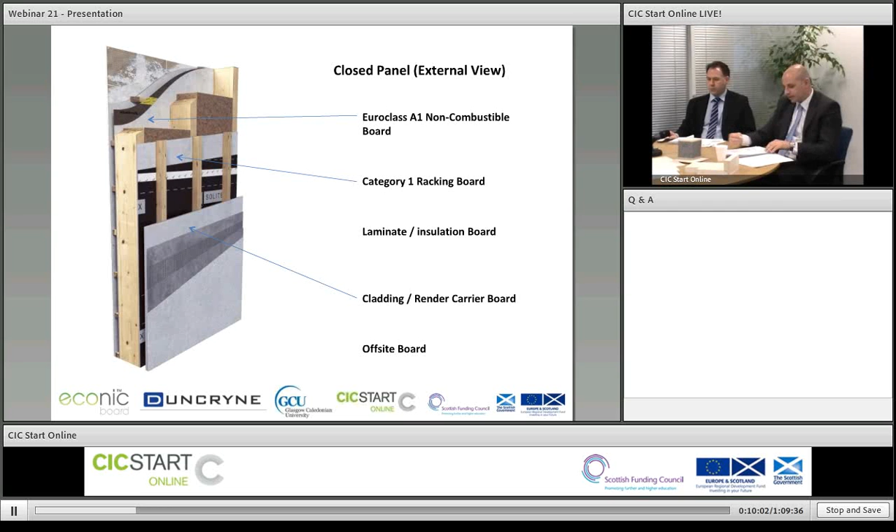It's also a Category 1 racking board, and we've tested it on both timber and metal frames. We can use it therefore as a sheathing board in lieu of OSB, instead of plywood or chipboard. Econic board's got an exceptional bonding surface, which makes it ideal for adhering different substrates, laminates, insulation, like our SIP panel, fixing wall ties, external cladding panels, etc. We've also had it tested to MOAT 22 and ETAG 004 for render carrier board, and it's passed for both painted and render finishes.

We also think it's good as an off-site board. We see it as an ideal replacement for the timber, as we said, and for use in off-site and volumetric construction. Econic board has got a very good vapour permeability, which makes it ideal as a board for use in a breathing wall construction. Econic boards are inert, non-toxic, free from formaldehyde, benzene, solvents. It's got no oil-based chemicals, therefore contributing, we believe, positively to a healthy indoor environment.

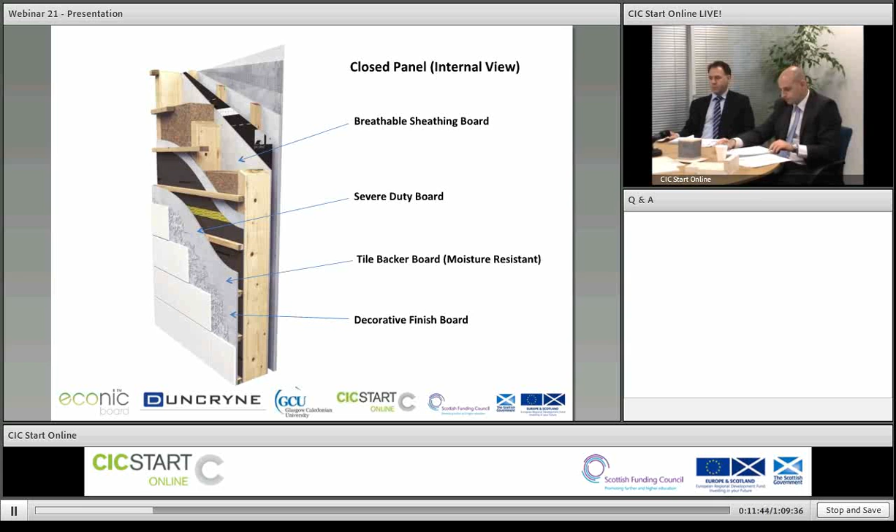It's also got a severe duty rating for impact, which we think makes it ideal for high traffic areas like schools, hospitals, institutions, student accommodation, etc. Because Econic board is unaffected structurally when it's in contact with moisture, and because of its good adherence properties, it makes an ideal tile backer board for both domestic and commercial applications. And finally, on its own, it makes a good decorative finish panel. It can easily be taped and filled and simply painted as a finished product. Next one.

This slide here demonstrates how versatile Econic board is. It's an all-round solution for many construction applications, and it compares favourably to competing materials in quite a few aspects. Given all these uses and potential uses, we have a number of applications and sectors where Econic board is being used and where we would like it to be developed: as a sheathing board, the most simple application; passive fire applications for cladding of structural steelwork, etc.; SIP panels, where it has been tested and is being used by a couple of SIP panel manufacturers at the moment; modular construction; non-combustible thermal and acoustic upgrading systems.

Here we are in discussions with a number of manufacturers to create new products to attach their insulation systems, whether it be for thermal or acoustic applications, to create a non-combustible solution. Finally, the biomass and agricultural uses are something that we would like to expand into, but also any ideas from any of the participants today, we'd be delighted to hear what they may be.

And finally, because we know what the board can do and its performance criteria, we were also very keen to know about its sustainability aspects. We know the process to manufacture the board. We believed it to be low carbon, low energy use, but we wanted this verified. So through a CIC Start programme, we were very pleased that Charles came on board to carry out a full life cycle analysis. I'll just hand over to Charles now to talk you through his studies. Thanks, David. Let me just push on to this.

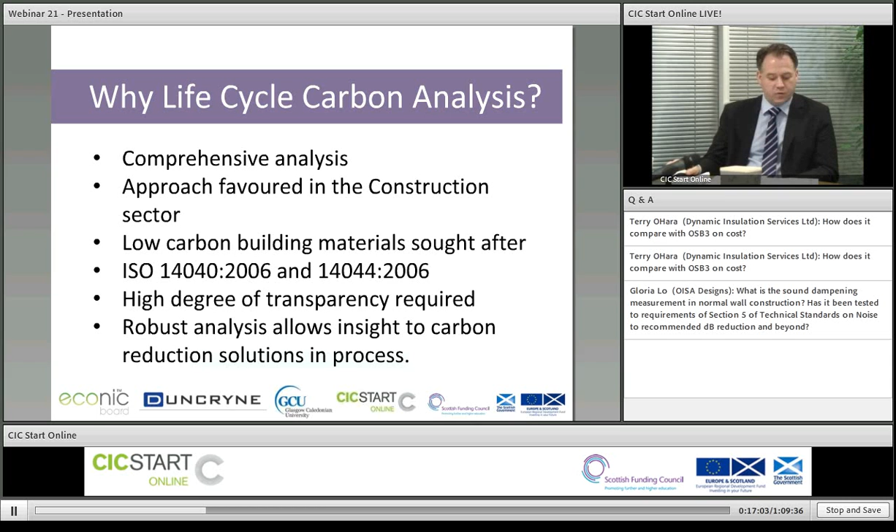Let's have a look and see what's included in this life cycle analysis. First of all, and it's very important, we looked at the embodied energy where we could of the primary ingredients. I'll come to the primary ingredients shortly. Secondly, we looked at the product manufacturing process, where the product is manufactured in southern China, and we've taken as much detail as we can to work that out and present that here. There is some limitation on what we can and cannot present for confidentiality reasons, but I think what we'll show here today will give you a good sense of what the life cycle analysis comes out at.

Transport to China, from China to the UK, there's obviously transport of the raw materials within China, and we've included that, but also one of the criticisms that's often leveled at companies importing products is that there's such a high amount of emissions associated with the transportation of the product to the UK. So we've looked at that; of course, that's included in our life cycle.

We've looked at the waste management element, and we've also looked at carbon dioxide absorption. It's a very important feature of this product. I'm going to go into a little bit more detail about that, because it affects the whole life cycle element. And we've assumed that 95% of the emissions that are associated with the manufacture of the product and life cycle of the product are captured by this analysis.

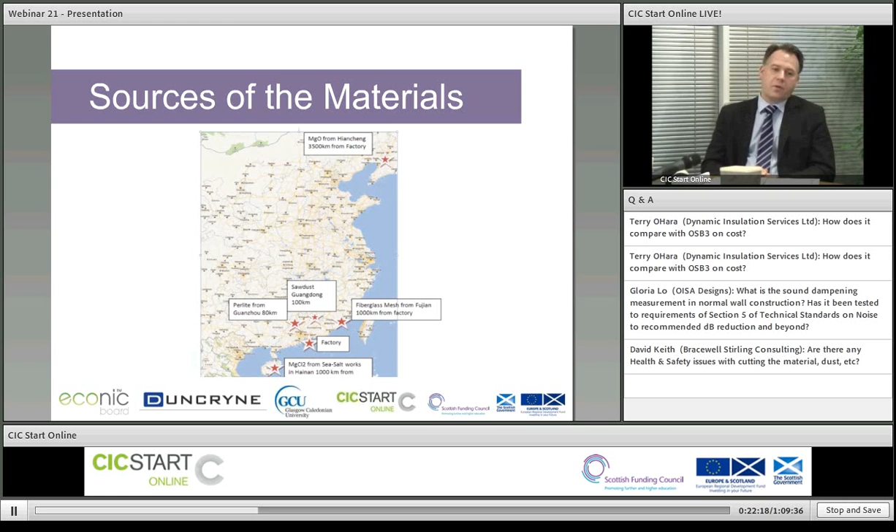Now, in calculating greenhouse gas emissions, I've used, really for the sake of simplicity and what's best available and what we can most likely verify, the emissions factors that are produced from DEFRA and DECC. These are updated annually and are very useful. What that document provides, publicly available, is emissions factors for all kinds of different transport types.

We've assumed bulk carriers for the products by ship, and we've also included the road transport, which would be articulated vehicle. Calculating these elements, it's effectively the distance multiplied by the emissions factor, and you need the tonnage that would normally be used. So this is a fairly important element of the raw material.

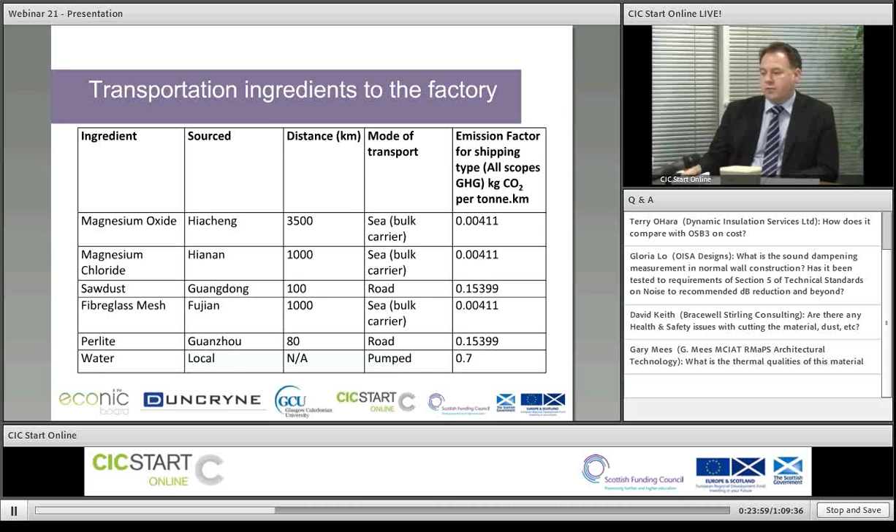But when we started to look a little bit further, there are obviously carbon emissions mainly associated with fossil fuel combustion. And because coal is being used and magnesium carbonate is being converted to magnesium oxide, CO2 is being produced in that reaction too. And because magnesium oxide is one of the primary ingredients, it meant that really we had to look at this in some detail.

Now, getting information about this is quite difficult from the Chinese end, so we've had to rely on industry-sourced work that indicates what is involved in terms of carbon emissions regarding magnesite production, calcination. So the magnesium oxide is produced by calcining it in these kilns for 2 hours at 700 degrees centigrade. And as I said, they use these coal-fired kilns.

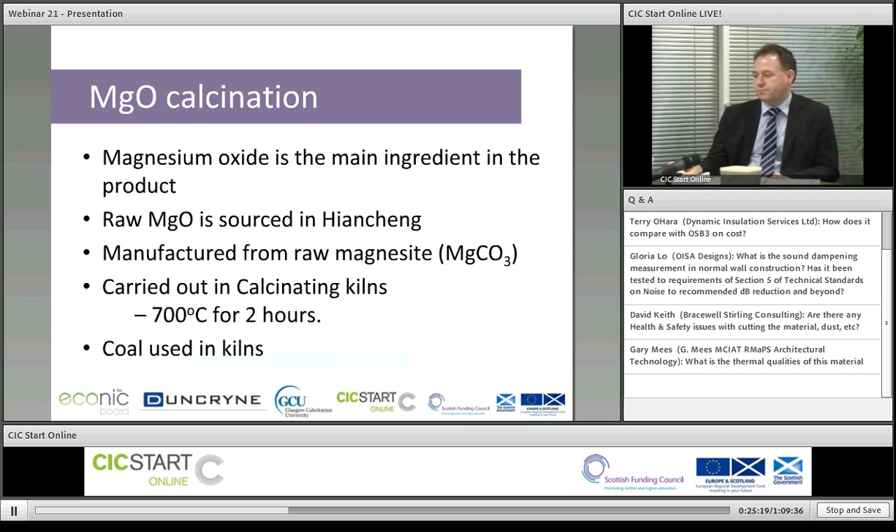There is also the mining element of the magnesite, the magnesium carbonate. We assume that that is 1 litre of diesel per tonne of magnesite mined, if you like. That's the assumption we've taken, and that's from publicly available literature. You can see that as we work that out, that gives us a figure of 0.006 kilograms CO2 per kilogram magnesium oxide.

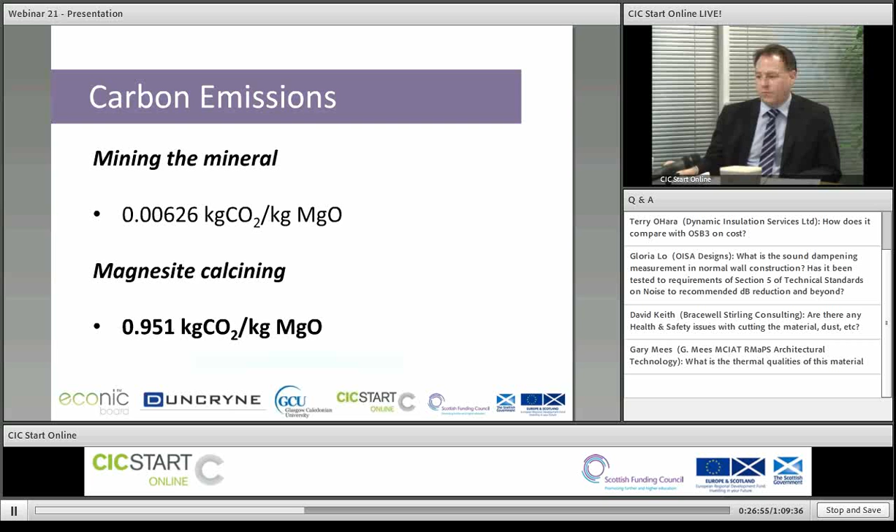Then the magnesite calcining, just to give the comparison, is just under 1 kilogram of carbon dioxide per kilogram magnesium oxide produced. So it's a huge part of the process in terms of the carbon emissions, and we'd expect that, because effectively you're driving off an equivalent ton of carbon dioxide for your ton of magnesium carbonate. So that's how it works. So that gives us something to work at. Then we looked at the magnesium chloride.

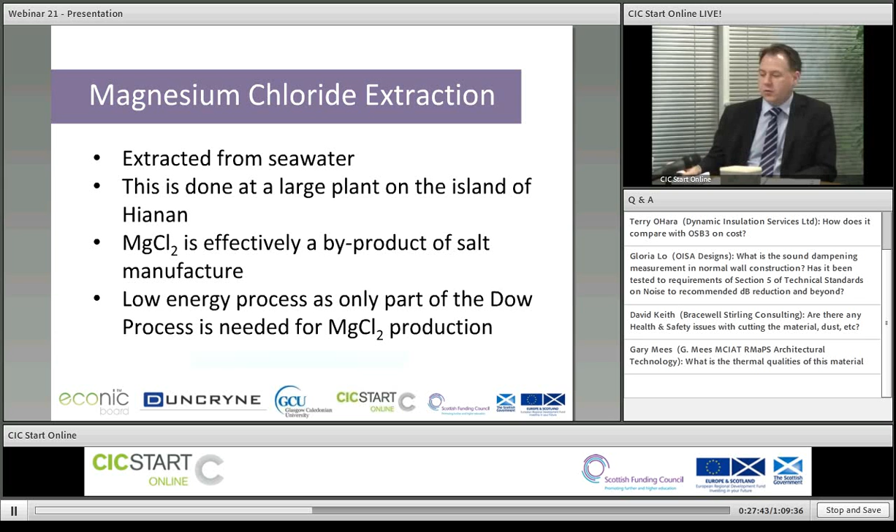What happens in the reaction? The magnesium oxide and the magnesium chloride react together, and a very important element of the structure of the Econic board is the reaction of these two compounds. But the magnesium chloride itself is really a byproduct of salt extraction, so there's really very little energy required. It's actually a low energy process called the Dow process, producing magnesium chloride. So this is actually how it's done in Hainan.

This is a very simplified process map of what happens here. Obviously, we're not interested in producing magnesium metal or chloride. That's the electrolysis part of the Dow process, which is energy intensive and uses a high amount of electricity.

But really up until that point, you have calcined dolomite mixed with seawater, which has already been reduced in moisture content. You precipitate it out, and then through a series of stages, you produce hydrous magnesium chloride, which is then dried, and that's then the product that's shipped to the factory and mixed.

It's important that the purity levels of the magnesium oxide and the magnesium chloride are robust. It's one of the things that our colleagues at the factory have told us, that having impurities does impact the quality of the final product.

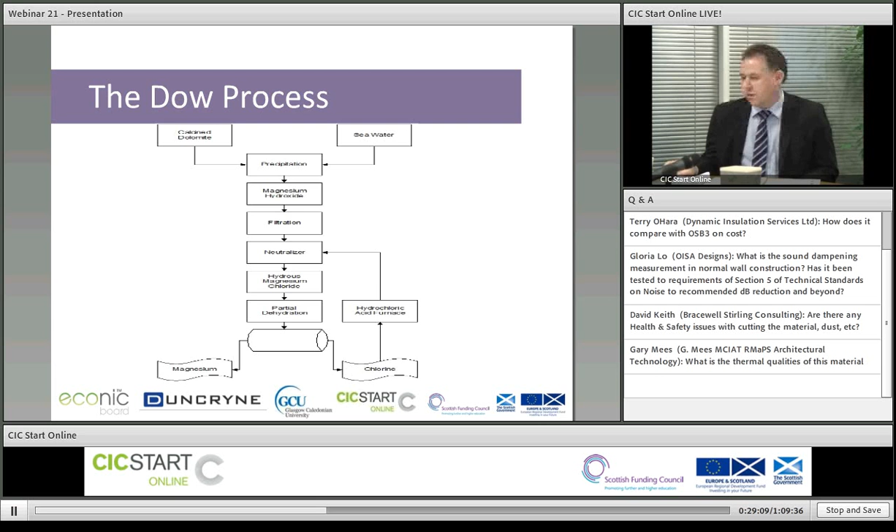The other parts, I'm not going to go into too much detail how we carried out the carbon assessment. Sawdust we've assumed as a waste product, so we've just taken the sawdust would either be disposed of in landfill or combusted, so we've assumed that's a waste product and there's no carbon associated with that.

The perlite, we've used a standard emission factor from the University of Bath's inventory of carbon and energy, and it's pretty much a text, a reference that we've used consistently throughout this work.

What actually happens when all these products get to the factory? They're stored in a way where they're kept dry. This is important. The storage conditions seem to be essential. So the compounds are mixed in the various proportions required, and it's mixed into a paste which is then poured onto a PVC molding plate. So it's a low temperature, there's no heat required to actually make the paste.

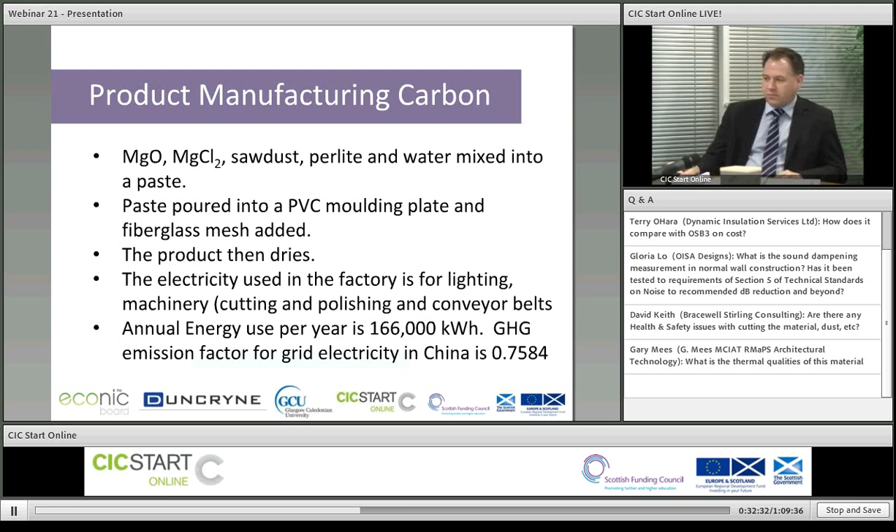Then finally, and this is often the step that there's some concern about in terms of moving the product, but in terms of the life cycle analysis it's fairly straightforward to undertake. There are three main segments to the journey. We haven't included, for example, elements like loading of the board by forklifts at either end. We've assumed that's going to be a much smaller part of the total emissions. That will have an emission, but we've just included what's going to be the bulk.

The factory is 30 kilometers from the port. That transportation is by road. And then we have a longer journey of 18,700 kilometers from the port to Grangemouth, and that's by bulk carrier. And again, there's road haulage in the UK, in Scotland, from Grangemouth to Inchinnan, where the company Duncryne have their storage facilities.

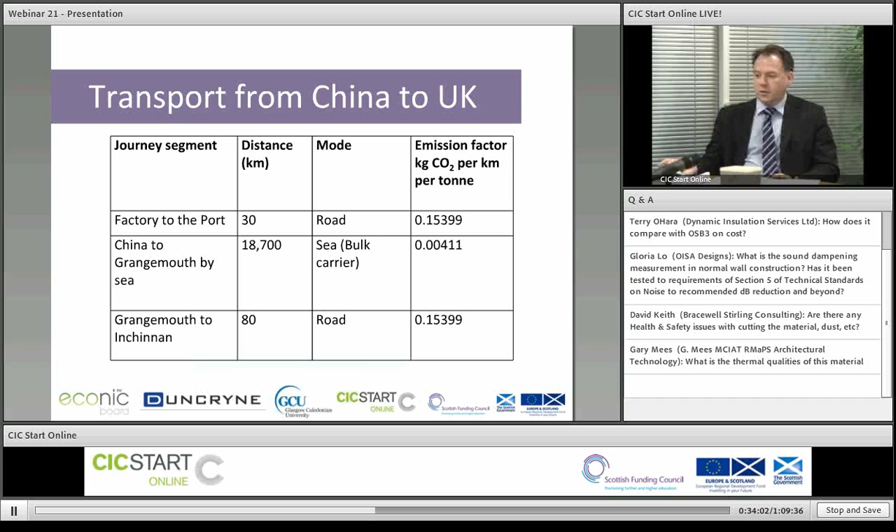In terms of the usage, from the storage to wherever the product then goes, there is an element, but we don't know how far that's going to be. So we've left that part out, what happens when it moves to wherever it's going to be used. But as you'll see, it's such a small part that it's not really so significant.

What I do want to look at, now finally, is the waste management part of the life cycle assessment. We know that these products have probably quite a long lifetime. I don't know how long that lifetime is, but they have a good length of life. And we do need to work out what happens at the end of its life. Being a construction material, it's unlikely that it would be recycled pretty much straight away. It could go to landfill with a very low percentage of carbon.

The carbon is in the form of the sawdust. That's the only carbon that's in there, apart from the absorbed carbon dioxide. But in terms of organic carbon, in terms of greenhouse gases, that's what's going to be converted to methane or to carbon dioxide. It's a very, very low amount.

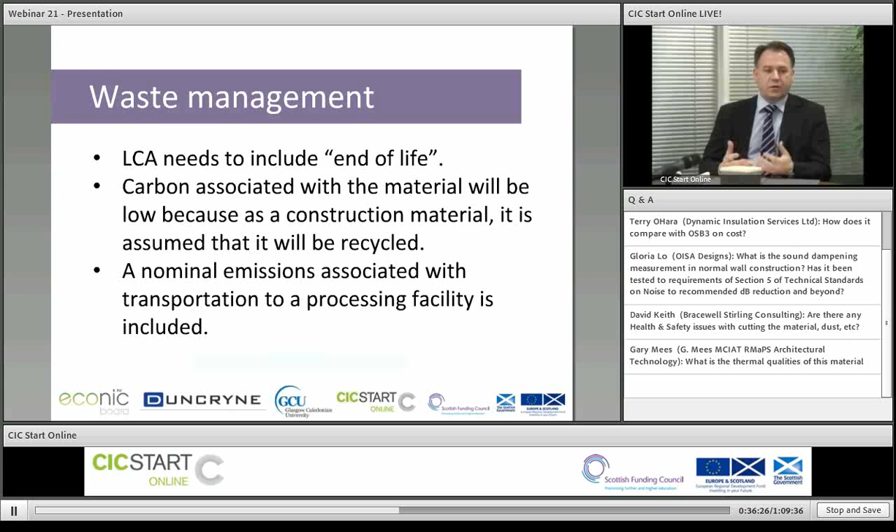We say that that's pretty much nominal, and it's probably something that we need to look into further for its end of life uses, but it would be not significant at all. What is important is that when the product is broken down, there will be further carbon dioxide absorption. So I'm going to cover that in this next bit.

Magnesium oxide is reactive with carbon dioxide and water in the environment. If you just take carbon dioxide and magnesium oxide, it will bind to a carbonate. Now, in this reaction, you have magnesium oxide, magnesium chloride in a mixture with water. And we know from the chemistry, which we can't really talk about in too much detail here, that a significant amount of weight is added to the final product.

And this can only be from the atmosphere. There's nothing else being added in the system, so it has to be carbon dioxide. There's been other work on magnesium oxide boards that's been published, and so we know that this is what happens. The actual structural chemistry, physical chemistry of this is actually more complicated than it just becoming a carbonate, magnesium carbonate. And if you want more information about that, please email me. It's probably too much to talk about in this particular presentation.

During the manufacture of the board, 20% of the final weight of the board is actually carbon dioxide. This is very significant. So it's actually reabsorbing CO2, and that's converted back into magnesium carbonate, or at least into carbonates, and held in the structure of the composite material.

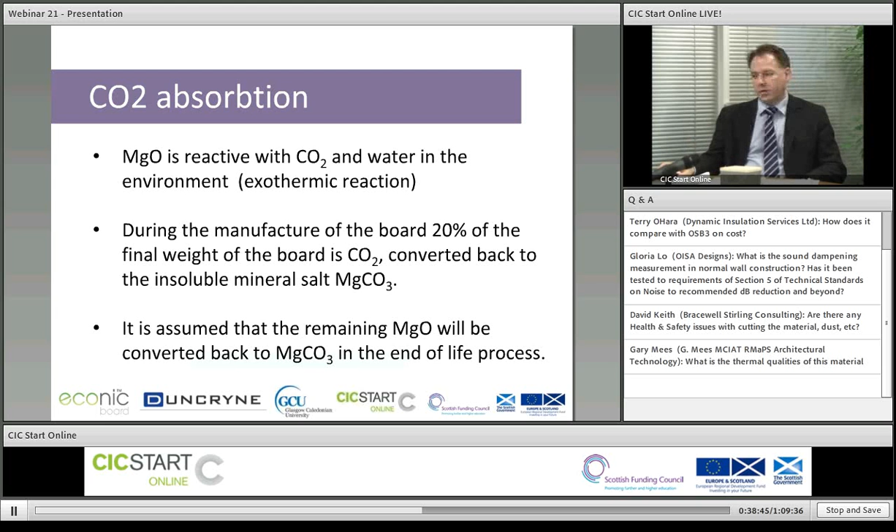We're also making an assumption that at the end of life, the remaining magnesium oxide will be converted back to magnesium carbonate, in terms of its environmental fate. So we've made that assumption. And so let's look at some of the numbers. We're kind of getting into the final stretch of the presentation.

What we were interested in looking at was, what are the main elements in the whole process? And we can see that obviously the main element is the calcining, the conversion of magnesium carbonate, magnesite, to magnesium oxide. Now, if gas was to be used instead of coal, which is the case in other parts of the world, they do this in Australia where they calcine using gas instead of coal. They have policy instruments in Australia that really have forced them to shift from coal to gas, because otherwise it's just so costly on the final product. They don't have that issue so much in China, so this is more of a how do we make the product even better. As you can see, it is a low carbon product.

We've assumed that there's negligible emissions from the magnesium chloride, but there is obviously the transportation element from magnesium chloride and from the sawdust. The fiberglass figure comes from the life cycle analysis work that's been done by the University of Bath, the ICE, the Inventory of Carbon and Energy. And perlite, it's naturally occurring perlite. There is some energy associated with grinding the product up and getting it to a point that it can be used. And water is just assumed pumped water, which is the pumped water that the factory uses, and there's very little waste water produced in this process. So in terms of water treatment, that's an insignificant element.

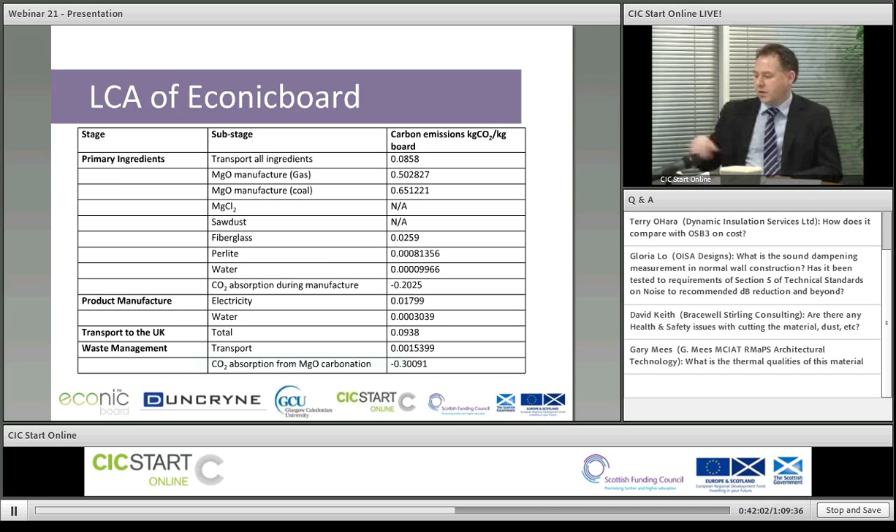The kilogram CO2 per kilogram of product, we have worked this out as 0.374 kilograms carbon dioxide per kilogram of the Econicboard product. And these numbers are only useful if compared to other things, really. It's useful to know for other aspects, but in terms of calculating the carbon associated with the whole building, these are very useful elements to have. As you can see, it compares very favourably, even against plasterboards. It's competitive. These figures are taken from ICE's inventory, so these are publicly available too, and we've just brought them together as a comparison.

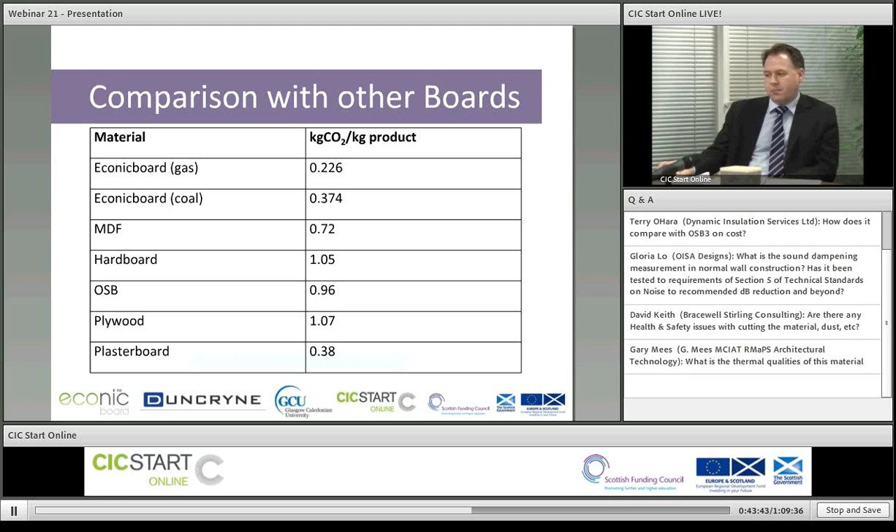It's interesting that it compares against hardboard. It's considerably better in terms of being low carbon, and plywood, as well as having other advantages that David mentioned earlier on. So that's where I wanted to point out the difference: if we were to use gas in the process, it would reduce it even further. And from that point of view, it becomes best in class at that point.

So to conclude, the Econicboard, from our life cycle analysis, and the life cycle analysis can go on for a long time and become very detailed, this is a fairly short piece of work, but we conclude that this is a very low carbon product. Although the process uses energy, and it will, by its nature, because it's made in China, have higher emissions factors because they use so much coal in their electricity and in their general processing, the high reabsorption of carbon dioxide into the product gives it a much better life cycle analysis than other materials. This is important. It's a very key element of this. If it didn't have that, it wouldn't be such an attractive product.

So it is manufactured in China, and despite that, of the whole life cycle analysis, only 20% of that is associated with the transportation. If there were ways to reduce emissions associated with that, that could also make quite a significant difference. So it's obviously the two elements, moving the raw product, magnesium oxide, from the north of China, 3,500 kilometers is a long way. But these are issues probably wherever the product was made.

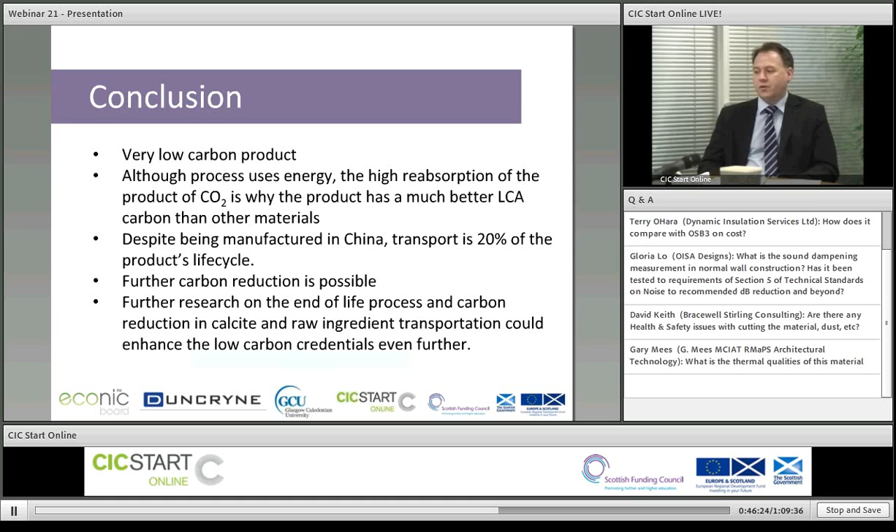And that is maybe easier done here, but obviously in a place like China, trying to work these things out could be very important, but it also raises challenges from doing it at this end. So I think that this will enhance the environmental credentials of the product further. And that's it. Thank you very much.

Thank you very much, Charles and David. And it seems that the product has attracted the attention of our viewers. We have several questions. Most of them are not really related to carbon, but to other aspects of this product. So here's the first question from Terry O'Hara of Dynamic Insulation Services Ltd. How does it compare with OSB3 on cost? Could you tell us, David?

Yeah, it is more expensive than OSB3, but it is non-combustible. So for our sheathing board, we've looked at pricing it less than fire-treated OSB, which we understand is about 3 times the cost of normal OSB, and ours is about twice. So we're looking at about £7 a square metre for our sheathing board compared to OSB.

I see. There is a question from Gloria Lo of OISA Designs, and she's asking, what is the sound dampening measurement in normal wall construction? Has it been tested to requirements of Section 5 of Technical Standards on Noise to recommended dB reduction and beyond?

No, not yet. Acoustics is one aspect that we haven't tested yet. We've done our own sort of sampling and testing, but we haven't done it to the UKAS standard that we've done the rest of the tests. And again, we'll be happy to speak to anyone who wants to look at it from an acoustic point of view. We're happy to do it. Okay, let's see more questions.